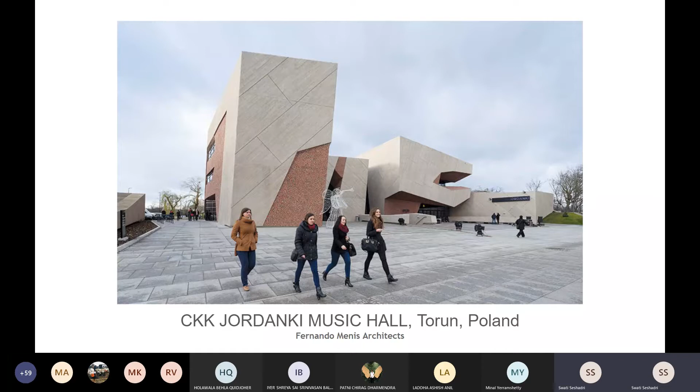So, hi everyone. We're looking at another project in continuation to what we saw last time. This is another project which is dealing with the acoustics, and it's actually a music hall. It's in this old historic town of Poland called Torun, where I'll just show you the Google map. So basically, that's the project that we're looking at.

This is designed by Fernando Menis, who's based in Tenerife in Spain. And that's the location of the project. There's actually a river down south running along the entire edge. And the interesting part of this location is, of course, one, it is part of the historic town. So there is that whole physical reference that comes in because of how the old town has existed in its

original architecture. But also, it's interesting to see how it's actually part of a very large green belt. So that's also a very kind of sacred aspect of the project, and that's been considered and taken forward. So, as you see, this was the plot of land, of which half has been taken over by the building itself, and the rest of it is actually a park and is used as a public park.

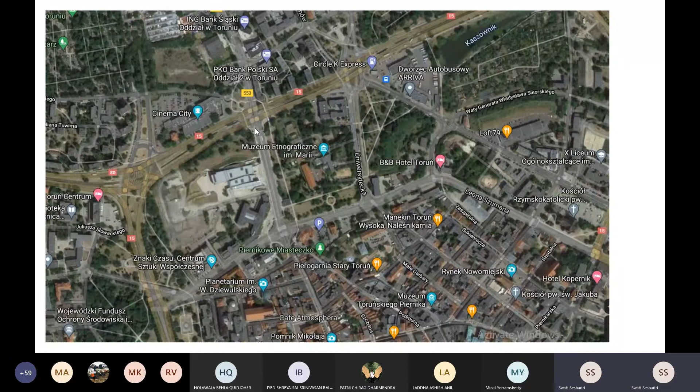So these are just a few images of Torun where you see that brick architecture is part of the old historic town, and this is actually a UNESCO site. So that's a very important aspect of the context that this project was being built in.

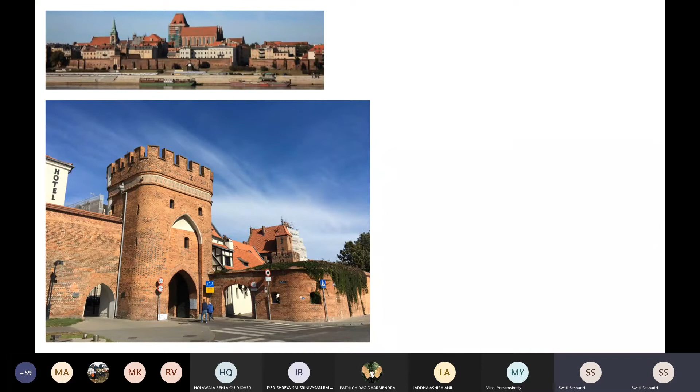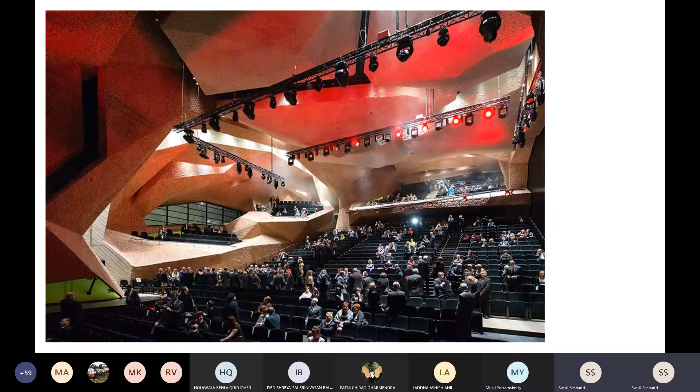So the project, and largely what we're going to see, is this music hall. As opposed to what we saw last time, which was a very clean, kind of flat box music hall, I mean, an auditorium, this one is very different. It has its own kind of charm because of the various movements that it is possibly making within the space that it's created.

So this is the main concert hall, and that's from the stage, looking at the entire seating space. There's a small balcony area also that is carved in here, and there's seating given at various points that you can see. And it's very interesting to see the material palette, and that's what we're going to speak about in detail.

So I think we'll come to the plans a little bit later. But what we want to understand largely is that it is four volumes. It's four large volumes where first, your cafe, reception area, etc. happens here. There is another hall happening here, which has lesser seating and a small kind of open air stage, and this is the main concert hall, where you have the larger equipment and everything else also contributing.

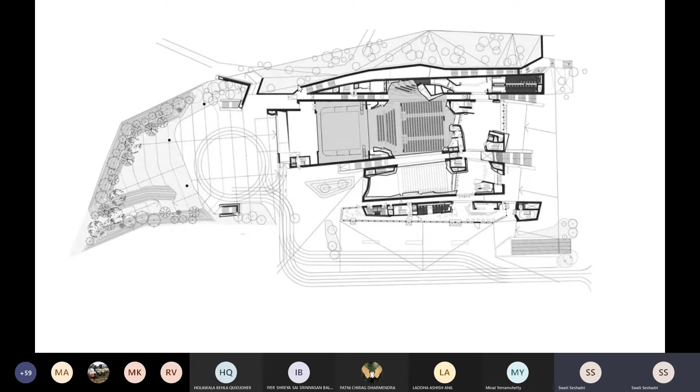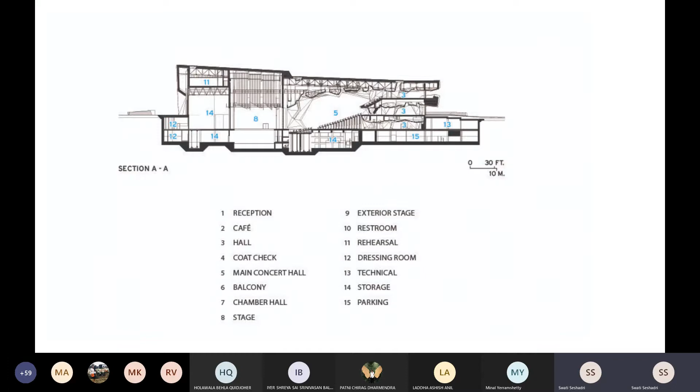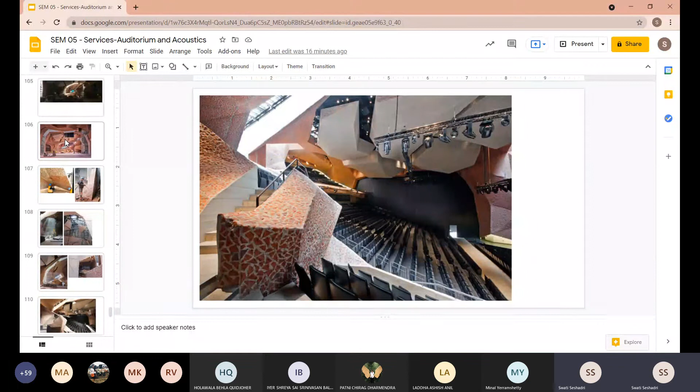There is a possibility of housing an orchestra, and that's your larger circulation and things like that. So yeah, I think we went through the programs at large. We'll come to some of these aspects a little bit later. What I would like to first talk about is actually what was thought about while developing the project.

This project is also special to me because I was part of the office at the time. I had worked on certain small drawings which were in the external development part of it. But only later I realized this project also went on to make a very big difference in terms of how the acoustics was treated.

Basically, the office did not want to deal with acoustics just using the wooden panels which generally get used. Fernando wanted to experiment with a different kind of method and material palette to try and see how this could become one big part of the larger context, and also use a material which is coming in from the context itself. So then there was a lot of experimentation in terms of what kind of methods of material processing can be used.

And this is interesting because there were brick chips which were cast in concrete panels, and then that was blasted in this manner, so that you get the various textures on the surface, and that allows you to also create more absorption and different kinds of possibilities for acoustics.

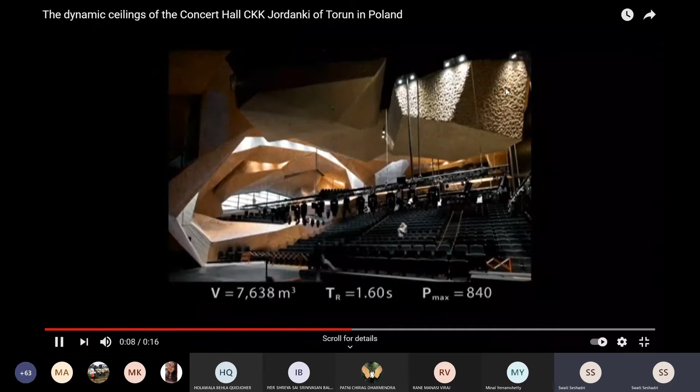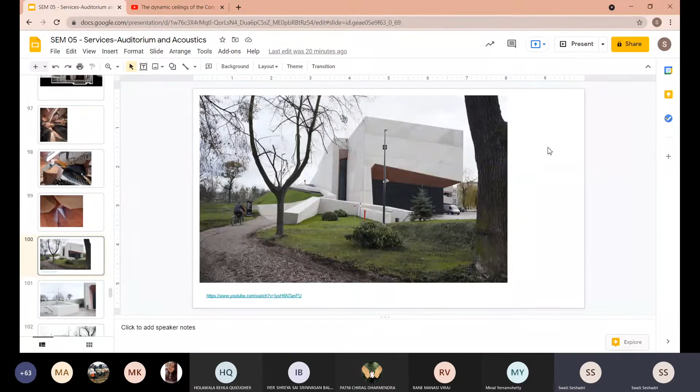So that's the interesting part of the entire concert hall. Basically, there are these large volumes of concrete that you'll see in the photographs. You've already seen it, and they have the possibility to move up and down, and that's the reason you're able to create different volumes within the space, so that you can house different kinds of music performances, or different kinds of performances which require different acoustic calculations.

And the office also works very hands on. So there were a lot of 1:50 scale models built before the project went through. All these angles were tested about 8 to 10 times. So the first reflection angle was checked, and then after that everything else was worked from there on. So it was made with physical models tested, and a lot of this has then become 1:1 after that.

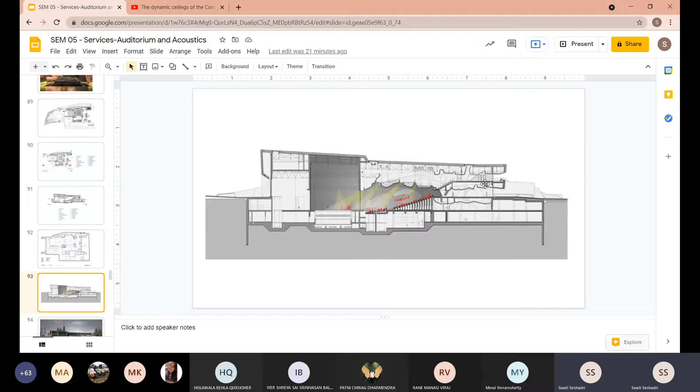But the interesting aspect is that you don't have a plain surface, and the material palette is completely carved out of what the existing context is. The building itself, the way it sits within the site, is trying to scoop into the basement as much as possible, so that it's not becoming a very large scale above ground level, where it's taking over the existing context, because the buildings around need to be respected. And then largely you're creating more cave-like spaces even within the building.

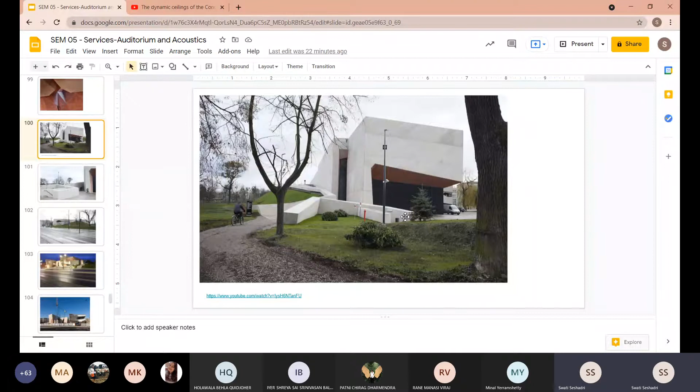And the interesting aspect from outside also, one second - I also wanted to include some of these photographs because it's about how even the concrete blocks outside have been dealt with and kind of detailed. The way that it has been detailed, the way it sits with the ground, I think some of that is very interesting to also pick up and see when you all start designing these aspects.

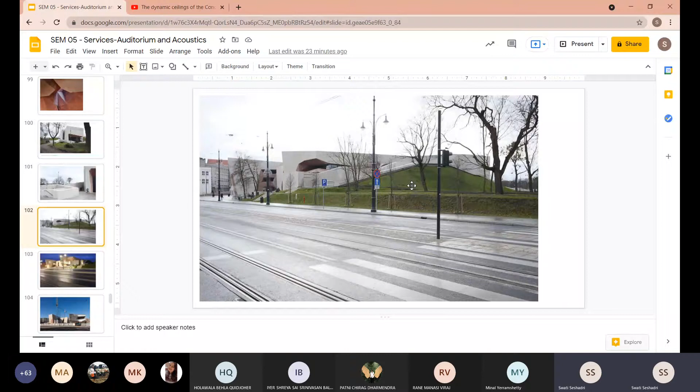So this portion which I said was the park is completely taken over by an earth berm, and then the rest of it, your building is also scooping from the inside into that, trying to create more spaces for your equipment, etc. And that's your building at night.

Basically the idea was also to create a rock, and create a mass, which is just cut through. So what you see outside is basically these pale concrete walls, and then you see the speckles of brick, which gives you a glimpse of what is going to happen inside, and what happens inside is completely the brick taking over in a sense.

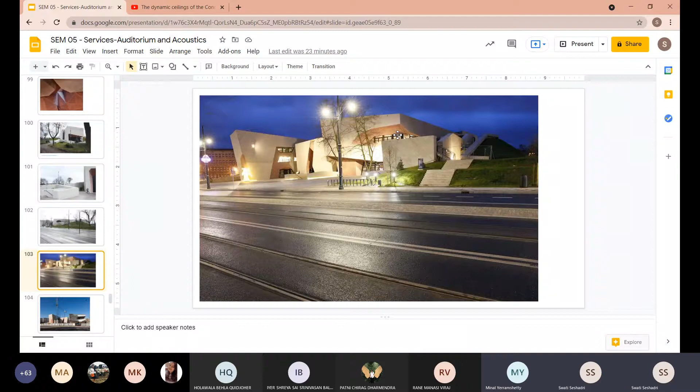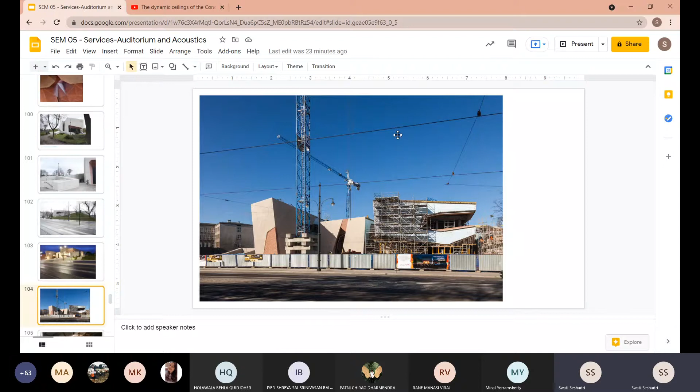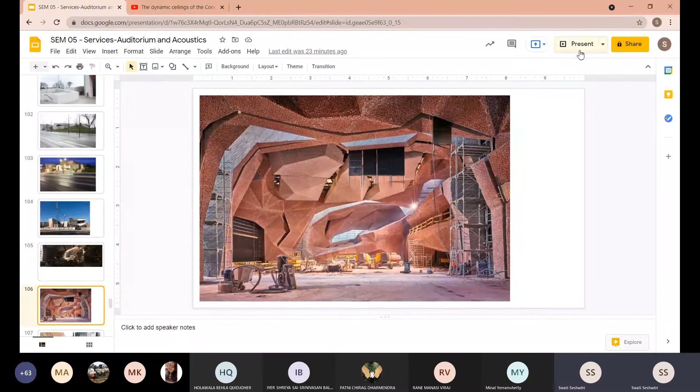So these are some of the construction photographs where you're seeing all your fabrication happening, and then each block is cast and brought to site. So that's what you see in the main hall.

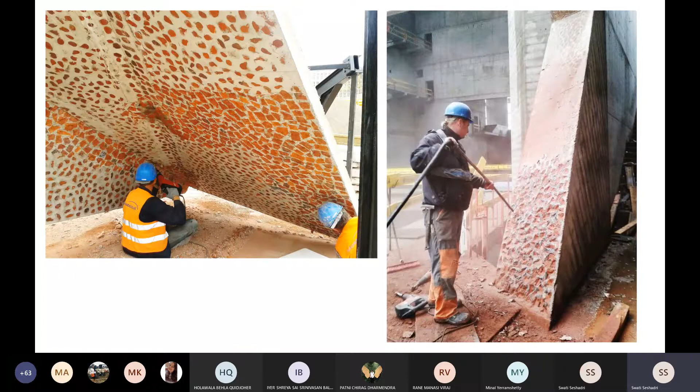I'm just going to run through some more photographs.

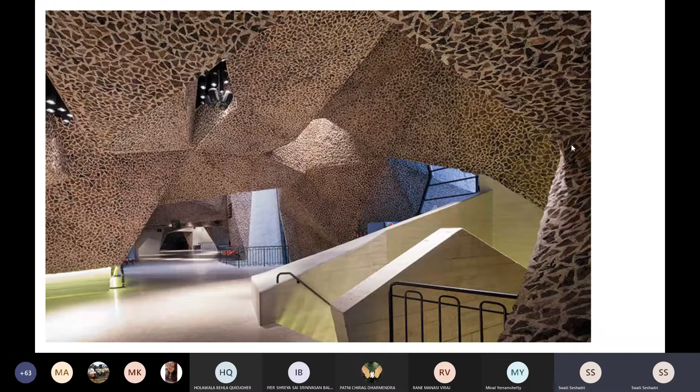So the same texture of walls, and the way that you wanted to create your volumes has been taken on the inside as well. So the entry, the staircase, etc., the same parapet walls continue within the building as well. And then what you see even in the breakout spaces is largely your textured concrete with brick. These are some of the office and admin spaces which also bring in the same thing. So because you have the cuts between the volumes that you have created on top, you have your light sitting within, so it also gives you a more diffused, not hard hitting sharp light. It has that possibility to graze the walls.

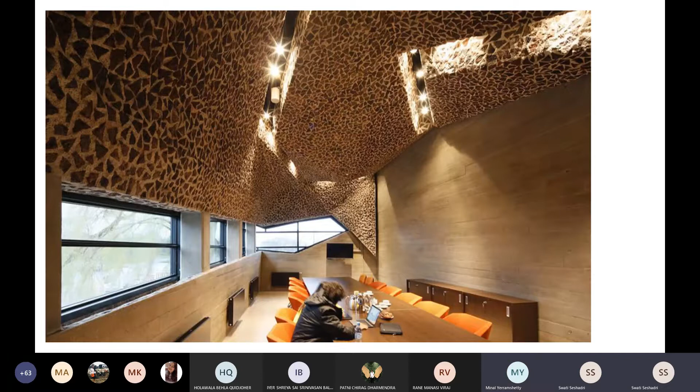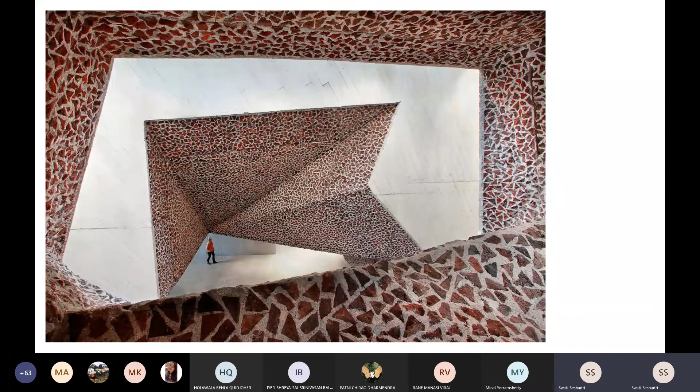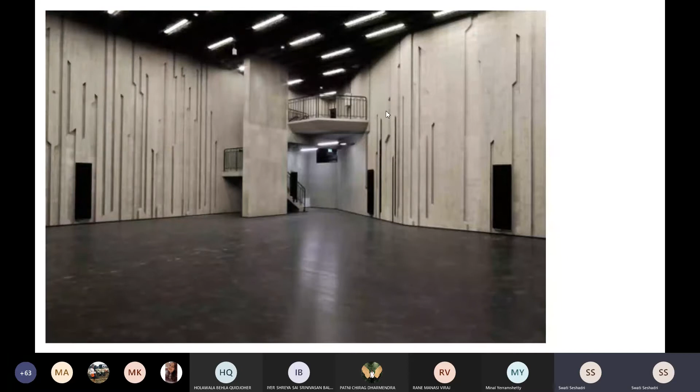These are some of the detailed photographs. I've also added this, which again comes in one of the circulation areas, and it's interesting to see how this is also Fernando's signature.

Actually, this is also interesting to see how the planes of concrete have been dealt with, and there's a lot of texture given to it. Of course, some of it also becomes details. Some of these are actually doors which can open up and stuff like that. So in that sense, it's not just ornamental or anything like that. It's more to do with it becoming a concealed detail for being used further.

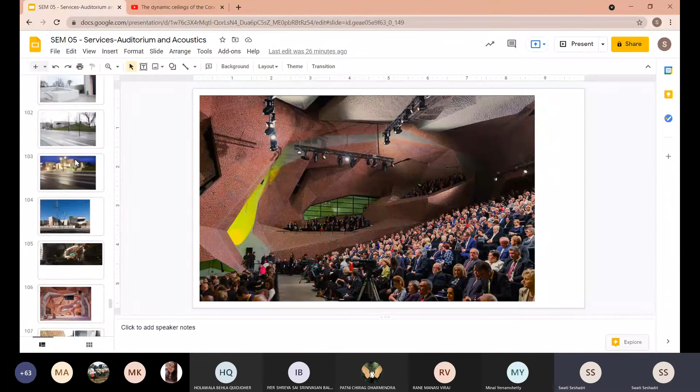That's the concert hall in its full capacity. Yeah, so those are some of the photographs. We can run through the drawings, and then we can probably just discuss more about this.

I think some of you will also probably know of the Magma Art Center in Tenerife. I think some of you all were studying the Calatrava Auditorium in Tenerife, or you all were studying TEA, right? And you all had also kind of given a reference of the Magma Art Center.

Yes, and this actually, the speckled effect of the brick has also come in from that. Magma had actually come in first before this project was on ground, and Magma also uses the same technique, but it uses it in volcanic rock. Because I don't know if you all know about this, Tenerife is also an area which is volcanic, emerged out of a volcanic mountain, Teide. So what you have is remains of the volcanic ashes and things like that.

So the volcanic rock was then used into the concrete plates and kind of blasted to create the Magma Art Center. And the interesting aspect also is that this way of working or developing a material palette was accepted by the government of Poland and Spain. They had got permissions, and after that, these projects were taken forward. So that was an initiative from the office's side as well. So yeah, it has some interesting milestones in terms of what they were trying to do.

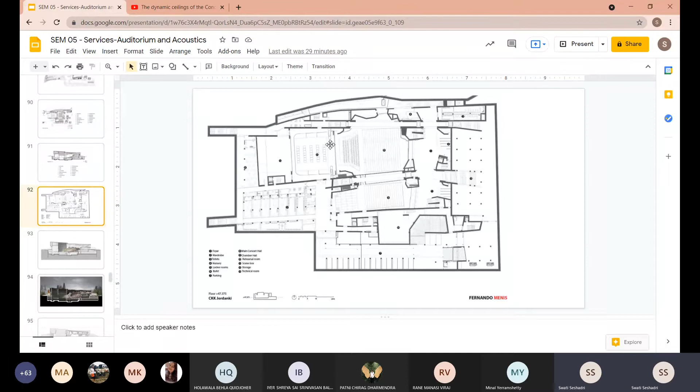There are some numbers mentioned about the amount of absorption, the amount of reverberation when you actually bring a surface down within this concert hall, what happens, and how much the volume can reduce by. All those kinds of numbers are also mentioned, so you could study that further. So yeah, that section is largely it.

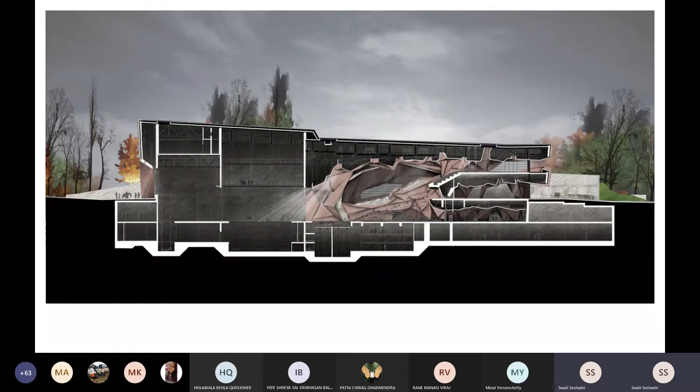These are some of the drawings that are developed at the office again. So it's interesting to see that that is the technique that is used in the office. This is from the stage.

So Minal, if you'd like to make any points, and then we can also ask the students if they want to say anything about this project. We have one more.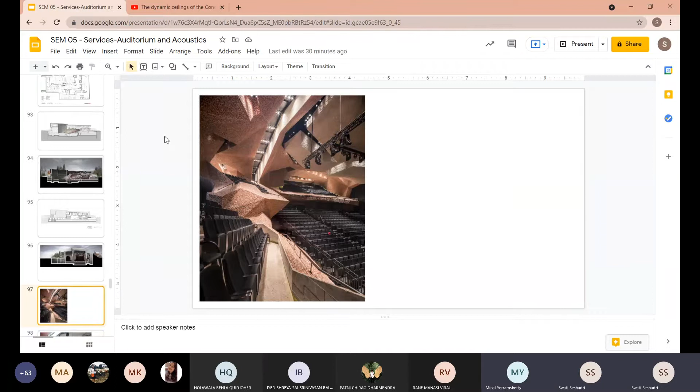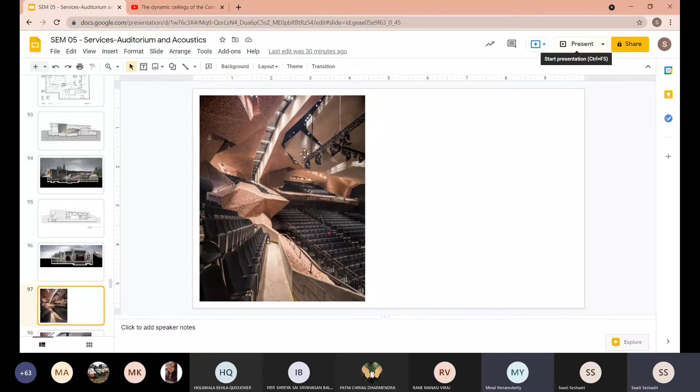Yeah, it's nice that you have worked on this. It's really amazing, and I think you are the right person to talk more about it rather than me. But what I'd really like to make you guys understand here and focus on is, because the next submission is going to be on this, and that's going to be your elevations and your sections. So the volumetric way of handling the auditorium plus the material — when you do your elevation, sectional elevation or elevation or whatever, material will play a very important role.

Third important thing is, I think the submissions that are lined up right now are all on your sight lines, on your sound lines, your RT calculations. They are very small, tiny, desk to desk kind of submissions. They are not like those major 30, 40 marks submissions.

But when Swati was talking about the material and the way the material characteristics can be changed by blasting them, by burning them, I mean, that's really amazing. And that's exactly what the innovations and the researches are all about. As you go in higher years, you will see how the high rises are handled, because you are looking for more sustainability. In this case, we are looking for more acoustic sustainability, where we don't have to depend on anything mechanical, but rather if we can achieve everything through the shape and the form of the building, I think that would be really amazing, like what Philip Johnson has managed to do in NCPA.

So yeah, this is a really nice example and nice formulative form, I would say, very nicely done. Nice materials as well.

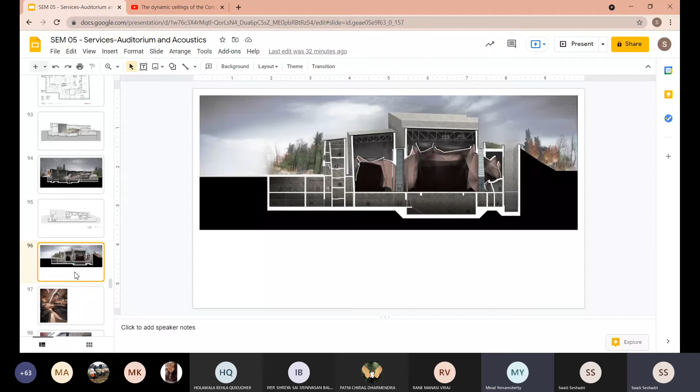So you had gone for exchange, Swati? No, I had actually applied to—I mean, this was after I'd finished my internship. I had written to them, and I was there for a couple of months.

I didn't work on this project too much, honestly. It was only about some working drawings that I gave out for the external development. But I was part of many other projects in the office. This one was interesting because even after I came back, it got completed in terms of construction, and that's when we started reading more about what it was doing in the larger scope of how to deal with acoustics and those kinds of things.

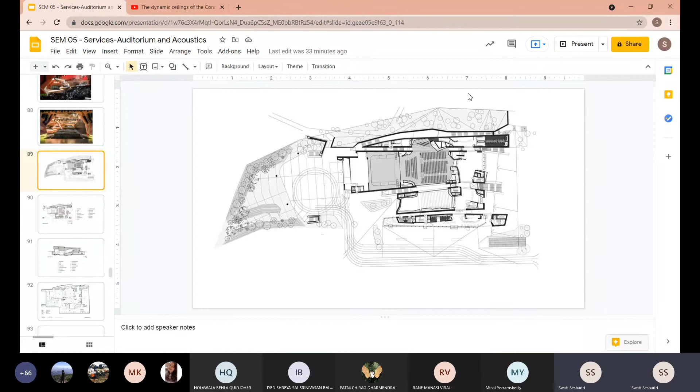So it was interesting to reflect on it later. Some bits, of course, I knew from what was going on as discussions in the office, but I think my personal understanding also grew later, and I could get the value of what was going on.

So yeah, the brick idea was also coming in from the aspect of the context, like I said, but to respect that and see what the contemporary take on it could be. So it was more about the forms.

If you study Fernando's work, most of it—there's this book called Reason and Emotion. I believe it would be in your library as well. I came across it in my third year, and the sketches of the office are absolutely breathtaking. I lived with it for the next two years, and that's when I wanted to work with Fernando, so I wrote to them, and I worked with them after.

But the idea of reason and emotion, the form coming out of emotion, is something Fernando speaks about and is also written about in the book. If any of you are interested in that kind of process, or just understanding what that mindset is, probably read more about it.

Most of the lectures you hear of Fernando are in Spanish, so you might find it a bit difficult to find many online. But read more through books, and if you're interested, it might help you develop some understanding and a way forward in this direction.

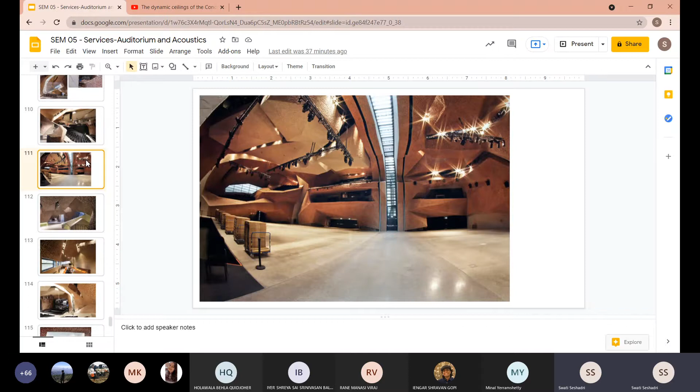So, like I said, if you're talking particularly about this project and how it was developed in this studio, there were sound engineers, and it's only with their approval that you could move ahead. There was a lot of hands-on physical development done for studying. The reflection, absorption, all of that was studied with scaled models, with the team on board. Once everybody said yes, there were 10 iterations to it. The 10th one got through because everything was in place, but the first 9 were just developments in that direction, with all the teams on board.

So it also helps to have all your consultants on board from the beginning, going through these processes together. It was not that the form was being developed separately, and then the sound engineer was called in to plug in whatever important aspects they required. It was something cohesively developed in consultation with both stakeholders. That process of collaboration since the beginning helps in coming to this point, in my limited understanding.

So you can't do this all without the sound engineer, right? No, you can't do this without your sound engineer. You just can't, because you're not trained for it. Are you an engineer or an architect? Last time I checked, I was an architect. Yes, so stick to that.

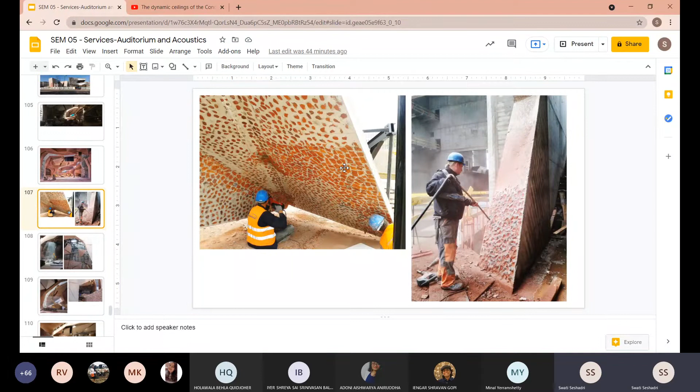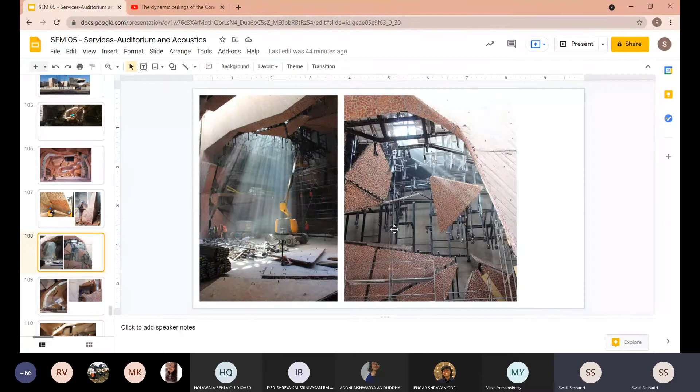So like I said, these panels that you saw - the entire thing is not cast in situ concrete, right? These are panels. They were developed and cast with the brick inlaid, and then as panels, after blasting, they were put up on your steel framework. So largely most of this is sitting on a steel framework. The rest that you see here are all panels that are brought in and set up after your steel framework is done, and they are just fixed with grouting happening between them. So that's the method of construction.

Okay, so the main support are the steel members inside, like a truss-like form inside the panelings? Yes. Okay, thank you.

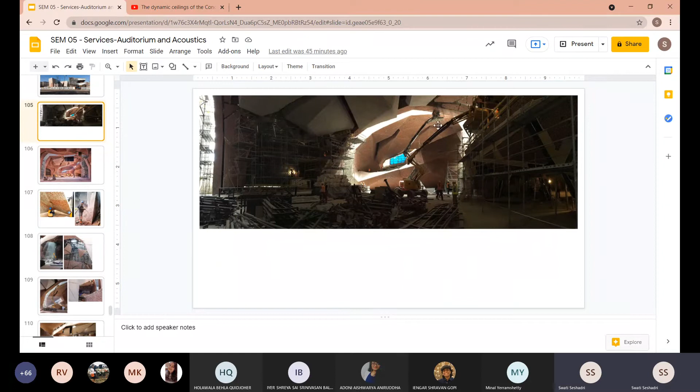So all the cranes that you're seeing are actually working to fix them in place. That's what's happening - they're all working at different heights to fix them in place.

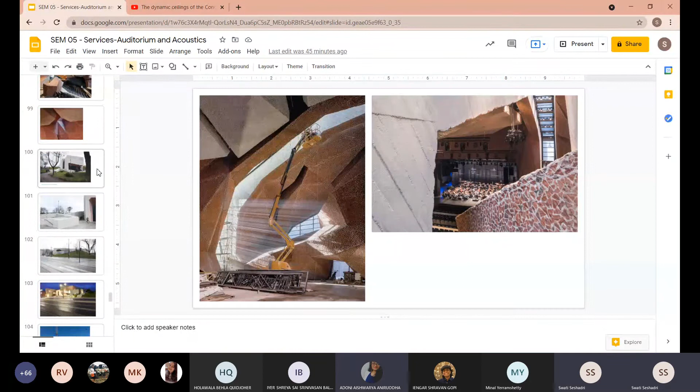So in this, guys, generally we are asked questions: how many sections should I make? Swati, how many sections did you make? Innumerable, right? As and when you need to fix the thing in place, you will have to take that many sections. So it depends on the form, it depends on the idea that you need to convey to the site and to the contractor. There's no limit to it - the drawings can be as many as you want to produce, and that's where the smartness of producing drawings comes into the picture, in what exactly the methods you will go by. Otherwise, after every five centimeters you'll have to take a section, but that's stupidity, right? You don't do that. So how would you then take sections that give the exact idea to the contractor of the form of the building? I think that will have to be done very intelligently.

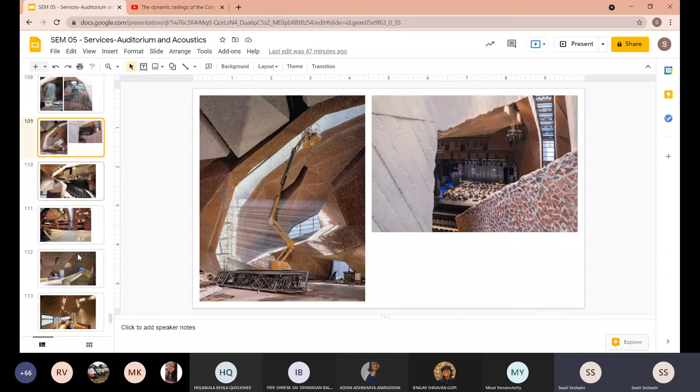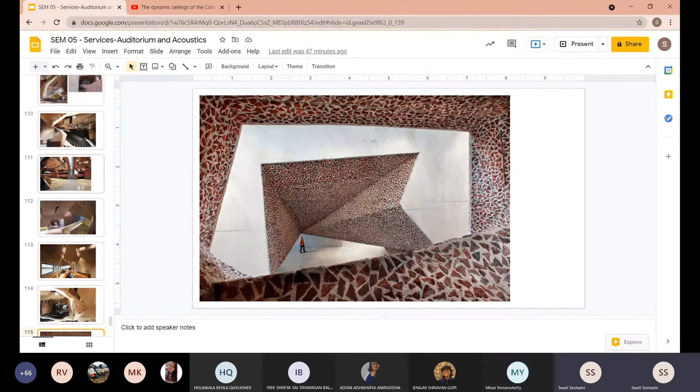In a case like this, even if we just decided on an overall undulation, like Meena said, we'll have to take it every five centimeters if that's the kind of undulation we have. But suppose we just gave an overall kind of terrain, and then provide that at every few meters, one can always discuss with the execution team on how many faces it requires to accommodate that kind of terrain. It depends on what you're taking - you can decide you have so many planes, place all your planes in plan, and then just provide that as information, and the site team can work out the rest from there.

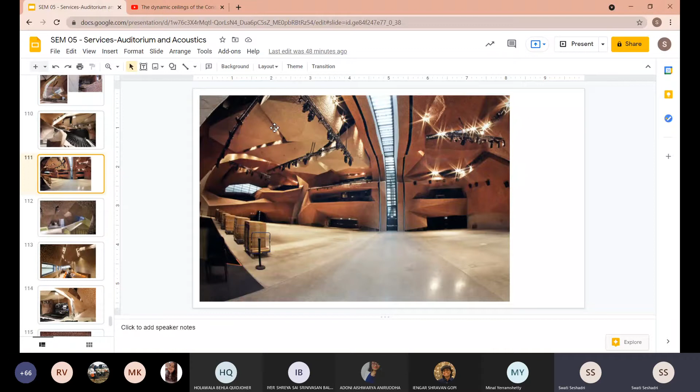But there has to be that possibility of a give and take between the two teams also. So that is another aspect. So you can't give all kinds of information in the drawing also. Or there are methods of drawing.

Like one of the projects we had done, we had an undulating kind of a ceiling. So how do you then convey which dip is happening and where it is happening? So you make a grid, and then you take a section, and you give that this is the total level, and then you actually took an RCP where you put it on the grid, and on each square you mark out that this is the thing that is coming down.

So when they started the construction, and they had to drop that J hook, the length was what they adjusted, and that's how they got the dip. Wherever the dip was happening, the length would be longer, and wherever it was up, it would be shorter, and that's how the entire thing was panned out.

Also, when you plan, there is a certain rhythm we take into consideration. There's a certain pattern that we consider, right? It's not random. Of course, that is also a possibility. Like here, it is random, but generally, people do opt to go for that. If I take this module, then it would be repeated maybe 2 times, 3 times, and so then it becomes easier to work out the working drawing. So there are various methods, guys.

So each time you see a building, think about the way the architect would have conversed with the contractor, and the clarity that you will get in terms of drawings, in terms of construction material, services, and how the overlay happens behind the facade. Like you get a nice looking picture right now in front of me, but uske piche what an architect had to do. He had to consult with so many people, tab jaake he got this. So it's a lot of work,

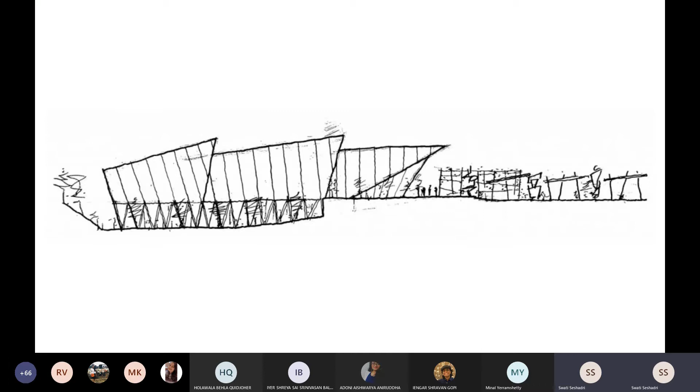So this is called Permata Pintar Auditorium. It's in one of the university complexes. And that's one of the initial sketches where you have all these triangular volumes emerging out of the ground. I'll just come to this drawing again later. That's your project, which is sitting in a more landscaped site because it's part of a university campus.

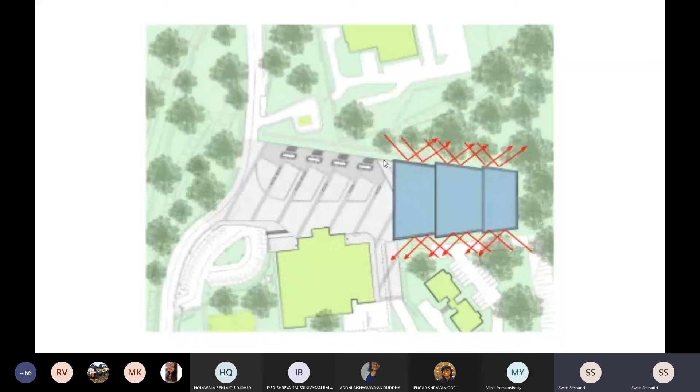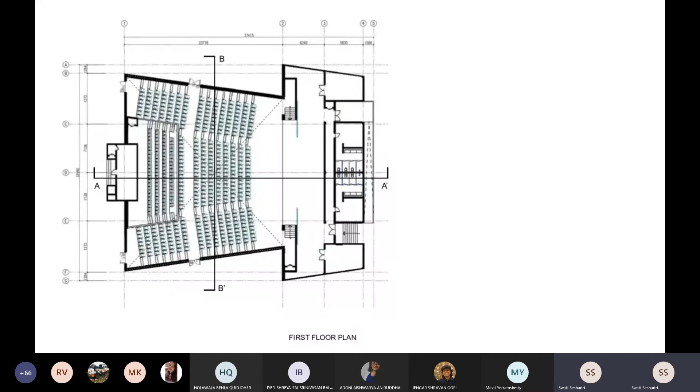And like you saw in the beginning, the material is a little more reflective on the outside, so it's aluminium cladding, and that is essentially to reflect the sound off and keep the volume free from any influx of the outside sound. And it's a very straightforward plan where you have this fan-out seating space, and then you have your stage towards this end. That's your balcony.

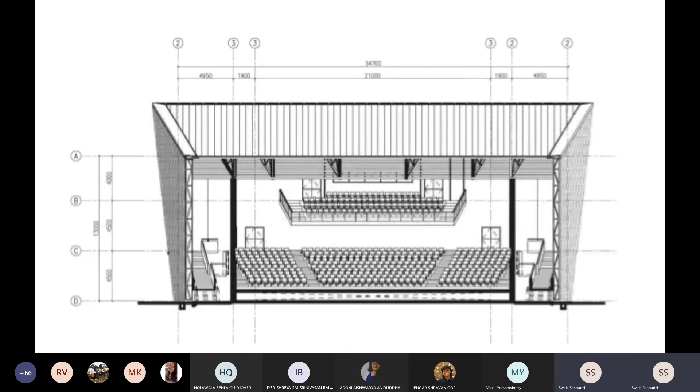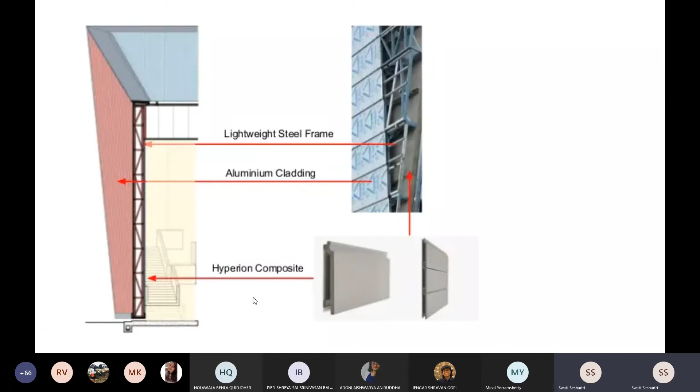So that is where your whole material palette comes in, and then you see that there is aluminum cladding on the outside, there's steel framework, and there's the composite kind of materials being used on the inside, which is still creating a double skin, right? Because you have the wall in the middle.

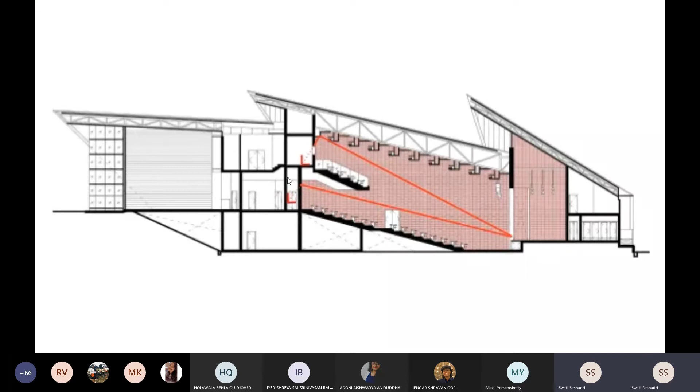Of course, again, these angles are also being developed considering the kind of reflection angles that you require, etc. So those have come across from there. So here this diagram also shows where it kind of gets reflected and hits back here on the last. So all those are based on calculations.

But the interesting part of the project was just these concrete units, where the block is carved out, and it's able to kind of absorb some of the sound, and that's why it makes the whole wall a little bit of a porous wall. And then you can avoid using your traditional materials that you end up using in most of the auditoriums, right?

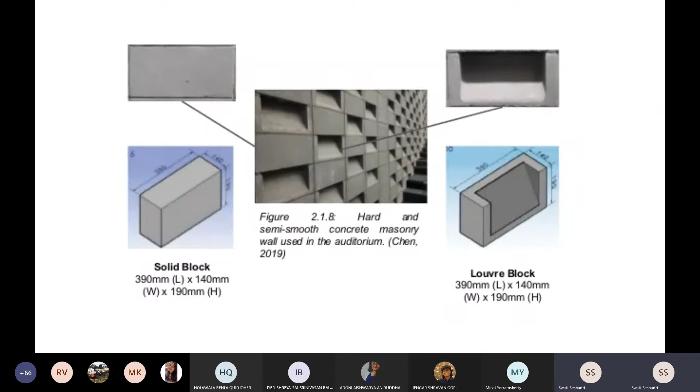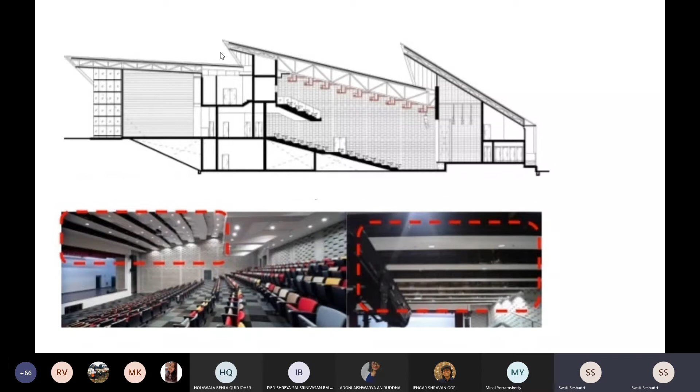So concrete again becomes a more absorptive material in this case by just creating some scoops within it, and then going ahead with using that as the final finish for the entire space. So then that's what you get, and then you have your ceiling, which is kind of fanning out again, because you need to maintain whatever reflection angles that you need to maintain.

See, these are some of the studies that are already existing, and that's been picked up and put here, so it's easy to also kind of see what people have already studied. So what you see is that the stage has been dealt with in a certain manner, where you have angular kind of ceiling on top, and that's how those are helping you to send the sound waves out to the audience side.

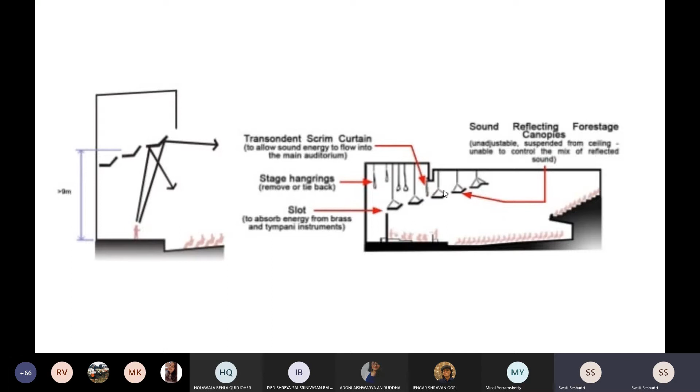Then you see what's happening here. There are details that are mentioned. There is a slot to absorb anything that is happening. There is, of course, framework that is happening above. The curtain is being placed here. Then the reflection of the canopies is mentioned as well, which is also that continuous terrain that is being created.

Yeah, so this was the other important aspect of the carpet being of a certain material as well, so that the flooring doesn't become a hindrance in your absorption of sound, etc. So that has been also spoken about and taken care of. It is an acoustically sound carpet, which is called loop pile in this case.

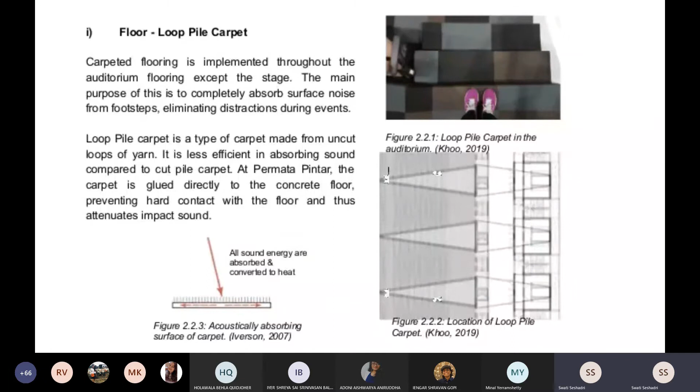Yeah, so basically the seating material is also kind of taken care of and things like that. Of course, that would happen in all projects. I think Minal would be able to tell us that the upholstery is also considered within the absorption criteria, etc. So that's just been spoken about a little bit more in detail.

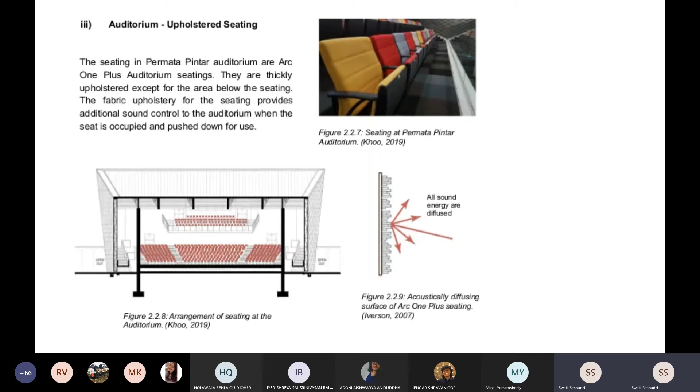So anybody who's looking at what kind of material needs to be used, or if you all are talking about these specifications, you all can always refer to some of these projects to understand that better. That was the idea of including it actually.

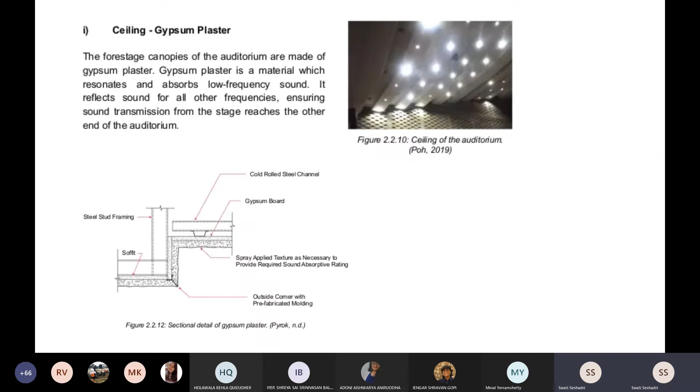Yeah, so the gypsum ceiling also, I think Minal has already spoken about this earlier. Again, the gypsum ceiling is allowing you to work with sound in a certain manner, and it's absorbing the frequency of sound in a certain sense. And the fixing detail is also mentioned here. So the steel framework that you need to create, and where do you need to create the junctions to connect them back into your main slab.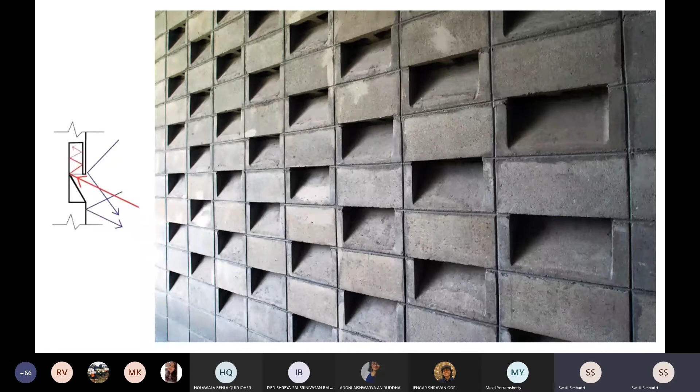So that's how the sound is working, and the module is actually helping you to create this kind of acoustically sound space. So anybody who's looking at a different material, again, this is a possibility to consider. And of course, there is a calculation of how many of them should be included, at what points you need the vertical bands and things like that. But that will happen as per the volume that you are creating, so you will have to work on that a little bit further.

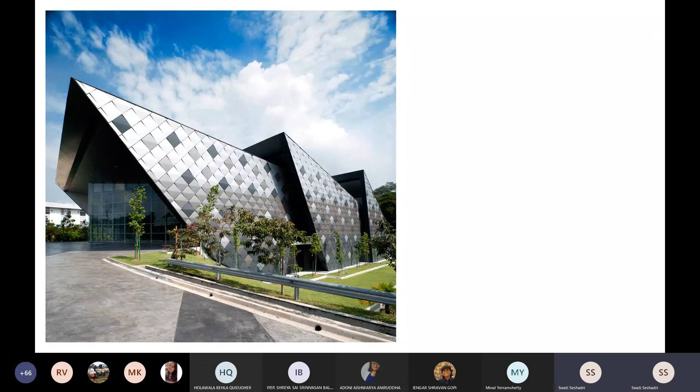But again, we've come towards the end of the presentation in terms of this project, where you're seeing the cladding happening, and sorry, I've gone to the back, sorry.

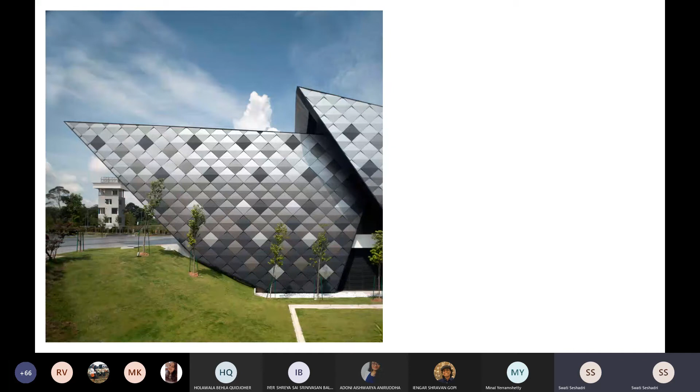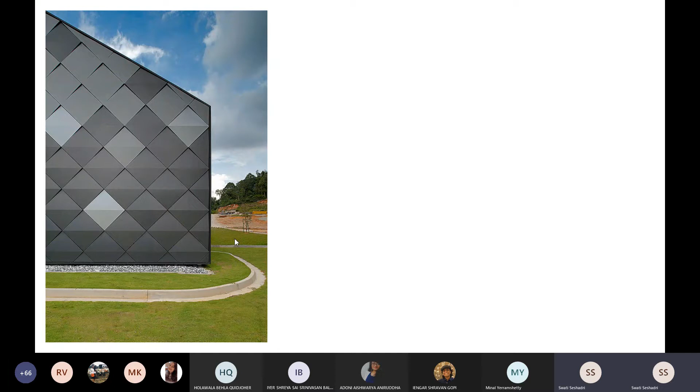I mean, my intent of including this was also to show you how the saucer drain is working more from the landscape perspective, and how these details are also important when you're planning on the outside. These things, of course, we'll come to later in the year, but just visually to give you a sense of what's going on. Yeah, no, I'm not a very big fan. Just included this to kind of sum up the project.

Yeah, so that's largely it. I mean, if anybody has any points to make on this project, we can discuss this. But yeah, I mean, my only interest of showing this was for the CMU units, not so much about the whole design of the project.

So guys, we looked at three kinds of sound diffusion methods, right? One was actual diffusion, one was reflection, and the other one was absorption. Now look at the paneling that is being done. Okay, they all look the same. But definitely the way they have been configured, or actually been done probably on site or probably customized, half of them are absorption, many of them are diffusion, and many of them are reflection, because they might keep the texture same, they might keep the color same, but the configuration of the material will change.

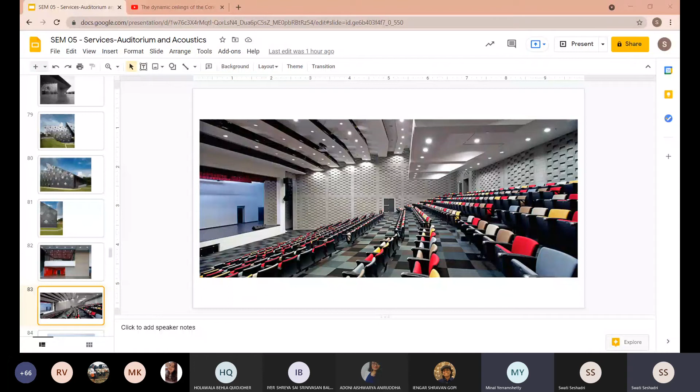Similarly, imagine lying on the floor and looking up at the ceiling to figure it out. What comes on the ceiling? First, your light grid - where are you going to place it? I'm sure in most homes that have done interior design, you'd see LEDs placed at the corners, or maybe a tube light. But there's a pattern we want to follow - it cannot be random, unless you haven't done the interior and it's just what the builder gave you, which is a different case.

But if you're planning as an architect, you'd think about how your false ceiling is going to look. You might decide you want your false ceiling to look as if it's floating, not touching the wall at all - people see this big square but it's not supported on either wall, only from the ceiling. So you leave a gap of say 6, 4, or 5 inches depending on your design, from the wall on all sides, so it appears supported only from the ceiling.

Or you might say, I don't want this light fixture itself visible in the ceiling - I want a very invisible, diffuse light, where I can just see the light but not the fixture. I see the light and I get illumination, but it's called indirect light. So if you want that, what will you do? In that 6-inch gap you've left from the wall on all four sides - I hope you can imagine what I'm saying.

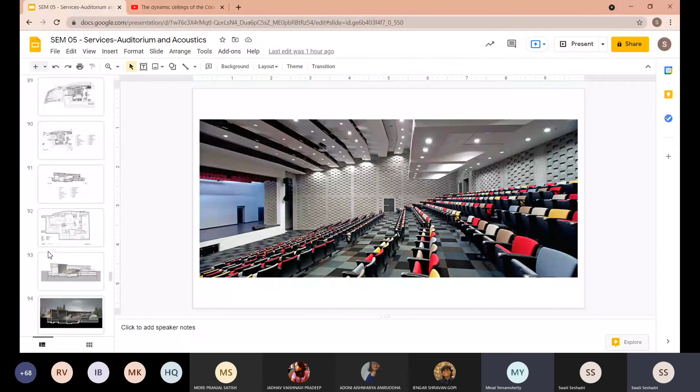Not in much detail, like we've seen examples maybe, but we've not seen the proper detailed construction behind it. Maybe we've seen a few examples. How example works, Shravan, always remember this, okay? Example is maybe for that particular project, but if you are working out the detail for your project, if you know the principle, then that detail is in your hands. You will have to tweak the detail to that principle, we haven't been taught that it will always come like this. This is the point of a false ceiling.

Now suppose you want a distance between two panels, okay? Say my gypsum panel board is 3x3 - I'm talking in feet, not meters. Can't have a gypsum board of 3 meter by 3 meter, but suppose 3 feet by 3 feet is my gypsum board size. But if I just stick them end to end, it will look very monotonous.

So what if I want to break the grid? And then you think, what if I have the gypsum panel, and in the gap between them I will put my AC grills or AC diffusers. And on the side we will put a grill. So all along the side of your wall, maybe you will project the gypsum board there too, and behind it you give me a duct, which is taking the air all the way back to wherever the AC plant room is. But there your grill remains and from above all your diffusion is happening.

So then you will think, no, I will do this only in the center. But when I go at the edges, I will join the gypsum board, okay? And then I will have the diffuser in the center of the gypsum board. Then you cut that gypsum board and fit the diffuser in the center, and that's all you just have to show, okay? You don't have to detail it, the carpenter will do that. Of course, when you do the real project, you'll have to detail all of it. But right now, you don't have time to do that, okay.